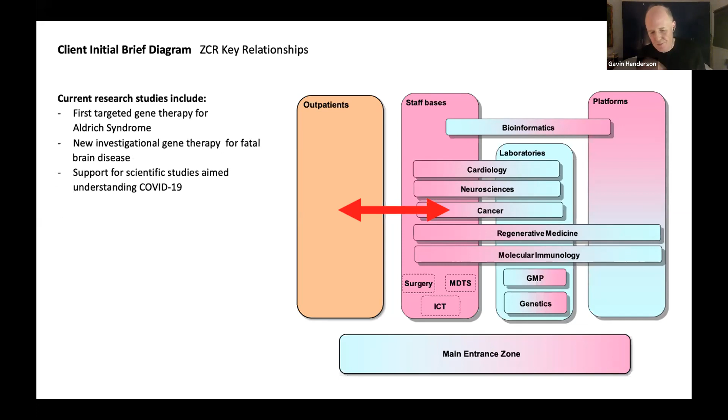Supporting this interdisciplinary approach, there was an extensive program of user consultation. There's a key central user group led by Stanton Williams, engagement with 8 separate user groups reflecting different aspects of the building. And these are supported by multiple subgroups and disciplines. Importantly, also including the Young Persons Advisory Group of patients from the hospital. So I think those of you who work on complex buildings will recognize the amount of dialogue that goes into developing a design for a building of this type.

And whilst this may look quite dry in this form, of course, it's actually all about people, you know, about engaging with different members of the community, particularly within the hospital. And this is a consultation with patients about their experience of waiting rooms and what they're looking for in that environment. And a very important part of that engagement was through the arts program that one runs throughout Great Ormond Street Hospital and has had a particularly positive input into this new building.

So what you see here are images from the development of one of the art pieces, which we'll see later in the talk. So it really is quite a complex and unique set of issues that we're dealing with. It's also a very unique site. It's at the heart of London's Bloomsbury Conservation Area.

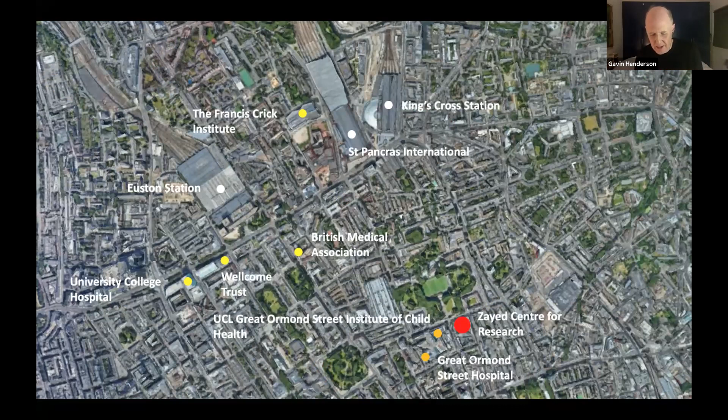And sorry, I'll just go back. What you also see here, in front of where the Zayed Centre is, you'll see there's a large green space, which is Coram's Fields, a space which has been dedicated to well-being for over 250 years. It's now a playground and other facilities. So there's this rather wonderful symbiotic relationship between the building and its contexts.

Coram's Fields was originally the site of London's Foundling Hospital. And as well as being a place of care, this was a place where Handel performed music and Hogarth set up London's first public art gallery. So there's this rather suggestive idea about care actually having a public face and being more broadly engaged with urban culture than we would currently see today.

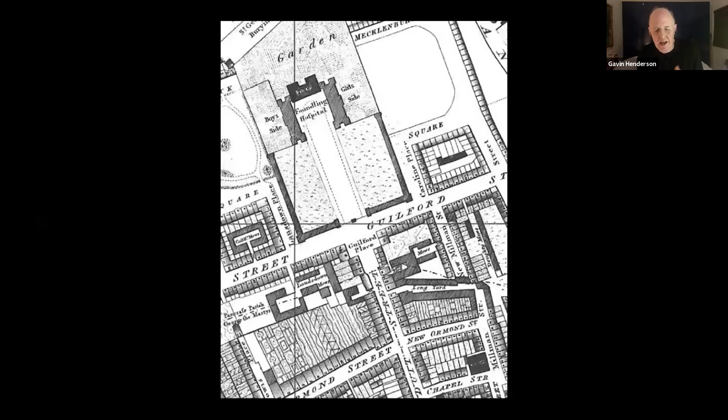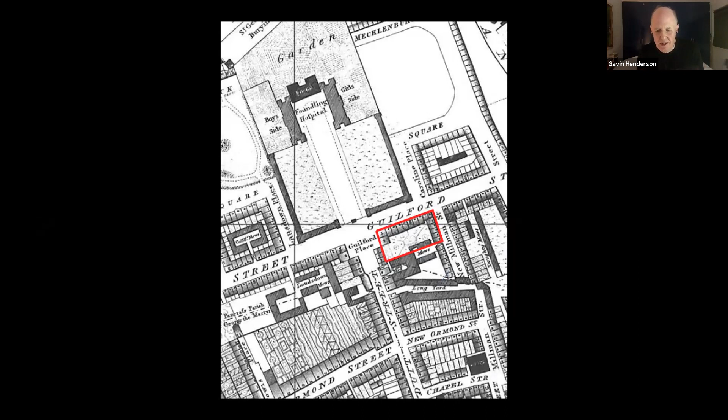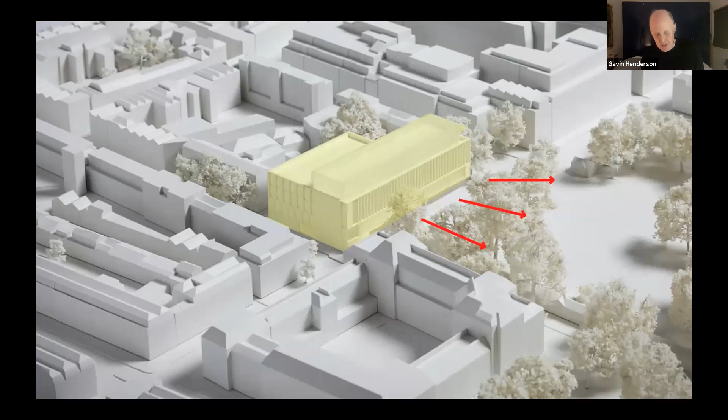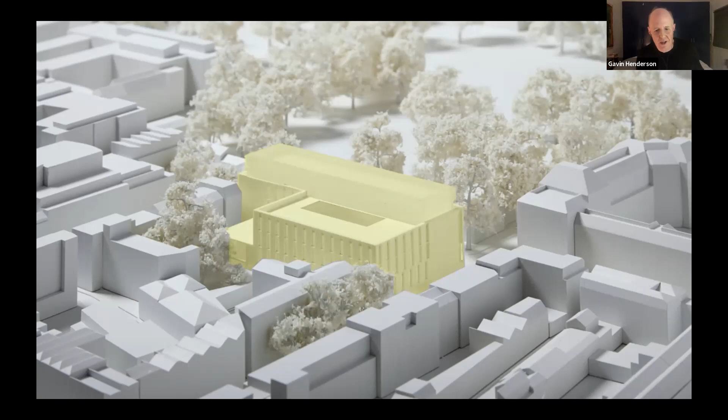The building has an almost civic frontage which faces north over Coram's Fields, but it steps down to the south to really embed itself in this very dense domestic context of the 18th and 19th century buildings. And a key factor of the massing that you see here was the need from the client side to maximize the amount of area that we could develop on the site, but then the control of that developable volume by an analysis of daylighting requirements and rights of light for all of these surrounding buildings. So you've got a higher volume facing Coram's Fields, and it steps back at different levels with different adjacencies at the rear. And that's what you see here.

It's a building actually that's best understood in section, really. The higher volume here facing Coram's Fields, but, with all these different things going on in the building, almost a layer cake of different activities. And we looked at different ways of organizing these, but there's a clarity here to the most technical parts of the building being at the lower levels or right at the top, where they have their own discrete plant areas. And what you can see here is we have a double height laboratory at lower ground floor level, right across the principal facade facing the street. There's other technical spaces at that lower ground level.

There's 2 floors which are largely outpatients department at ground and first floor. Above that, we have research workspace, and then we have clean rooms which are working on gene and cell therapies, which is Europe's largest clean room facility of its type.

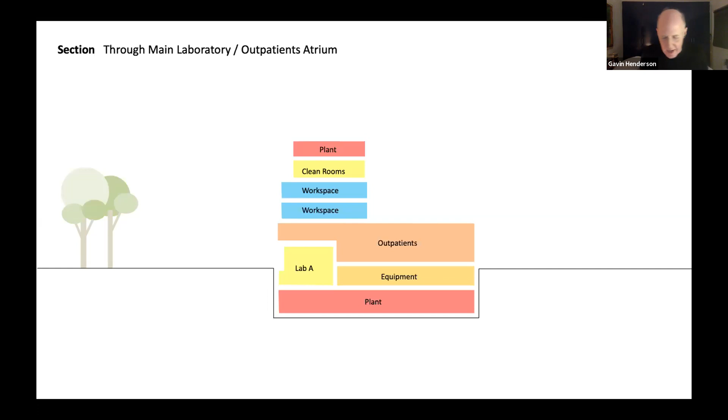And the experience when you're in the building is very much about the relationship between these different activities and between these activities and the external environment. And in particular, this is quite a deep block. It's a building 75 meters long, 35 meters across. So there's a lot of attention into bringing daylight and views into the heart of the building.

And that's very much tied to this idea about placing the experience of children's families and staff at the heart of the design, which is about well-being and also reducing stress for patients. And that approach to well-being is closely linked to targets for carbon reductions and sustainability. Things like the approach to daylighting, obviously working across both well-being and the sustainability strategies.

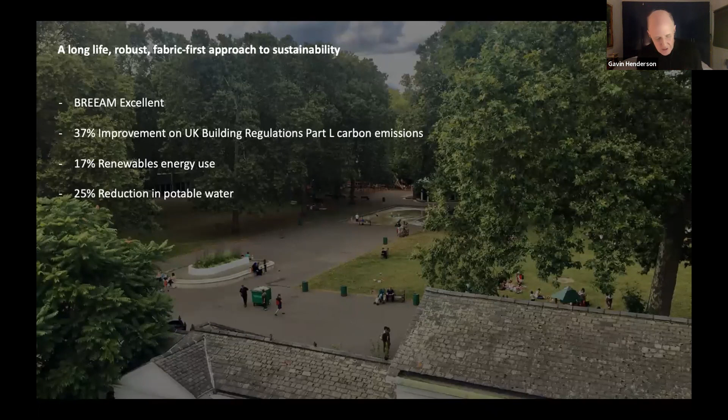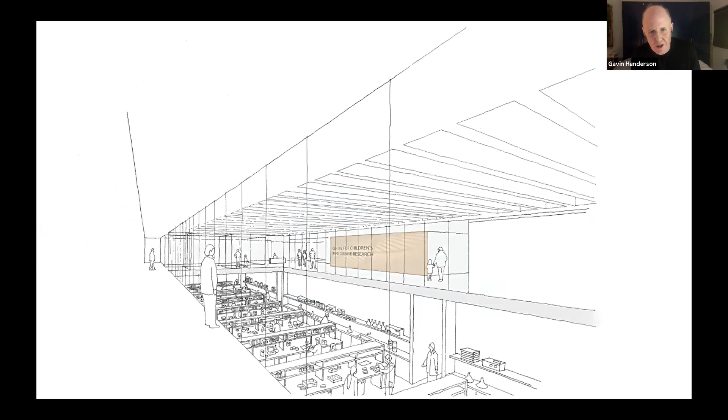Now, hopefully that gives you a sense of the kind of issues and approach to the building that we're looking at. Before I walk you around the building, I want to give you a flavor of how we develop these ideas. In particular, I think there are a number of important themes: the sense of connectivity between different elements, the balance between quite specific spaces that we've created and the flexibility needed for science. In research, I think the mantra is very often nothing is certain except change. So that sense of adaptability is important.

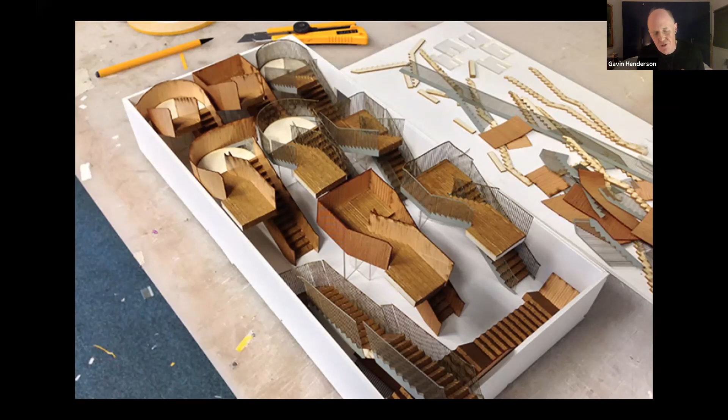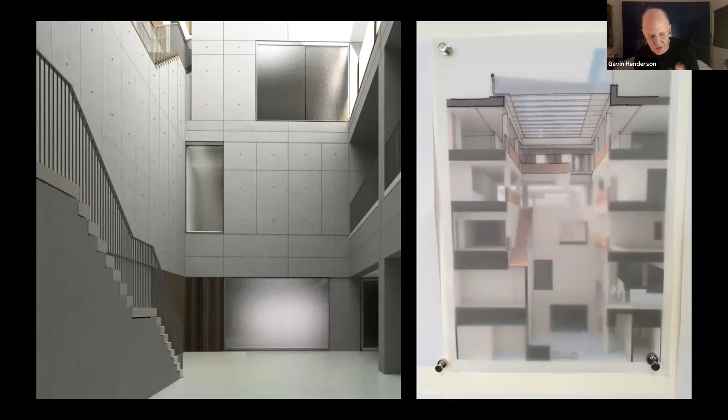And then the way the facade in particular has been developed in a way that relates to its context and relates the internal activities to what's going on outside. And for us, the way we work is very much about working with simple physical models of different elements and spaces. That's exploring the ways that the spaces are connected, almost in a sculptural way, and testing proportions on physical models that work alongside the IT tools that, of course, we use for our technical design.

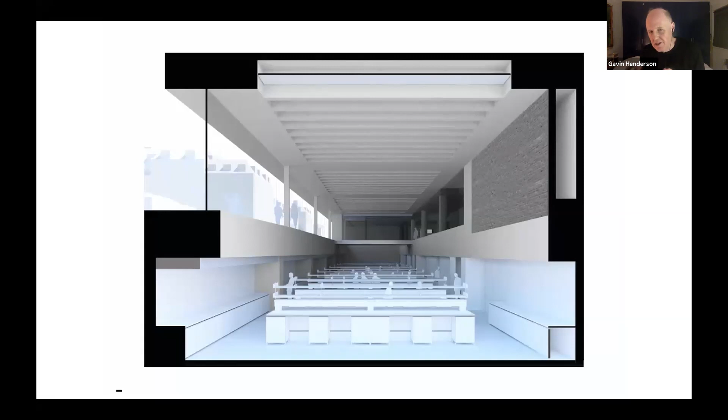And during this process, we're developing a robust language, really, of semi-external materials. And that's also about reinforcing this connection between the inside and outside, and is pulled through even, or perhaps in particular, into the main double height laboratory that you see here. So much of the building is a robust exposed concrete frame. And I think the approach that we bring to this kind of space is very much about using structure as the space forming elements.

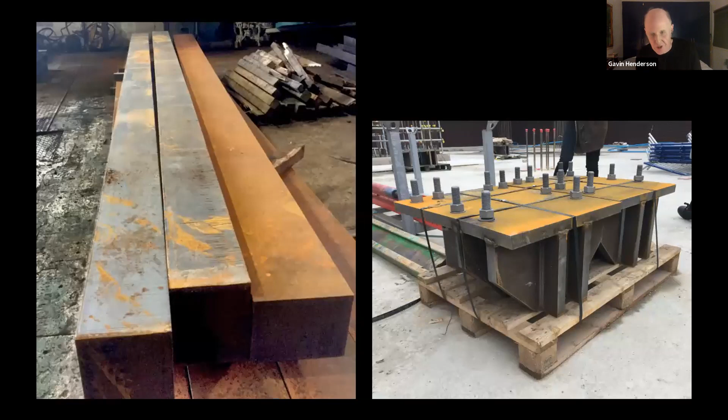And here, again, on that double height laboratory, on the upper left hand side is that street level where you'll be looking down into the space. And the whole building at this point is supported on some slender, solid steel billets to maximize the sense of openness. So there's some very carefully considered structural design to achieve these connections. These are those steel billets, rather beautiful connections within the structural frame.

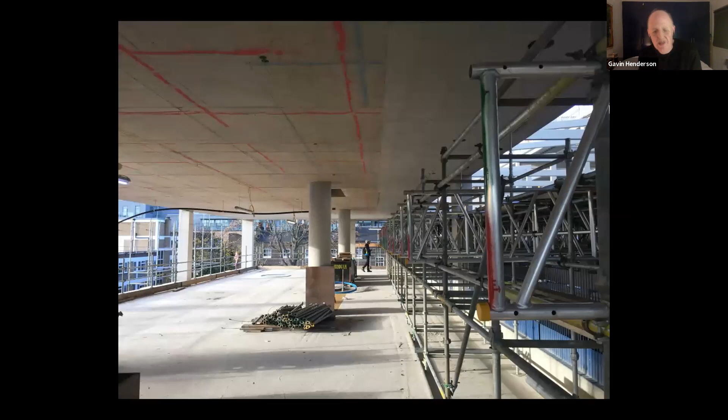So that sculptural use of structure extends throughout the principal communal spaces. So we see these as quite permanent spaces, which carry out the main communal functions and allow you to move through the building. But it's quite important to the understanding of the building to see that these are balanced and that flexibility and adaptability is provided within the more workspace functional areas. And this is a typical approach to those floors with a 9 by 9 meter structural grid and a flat post-tensioned slab to allow for ease of rerunning services in the future.

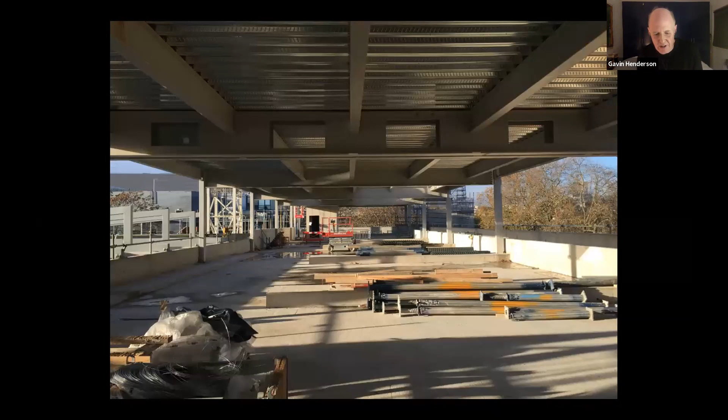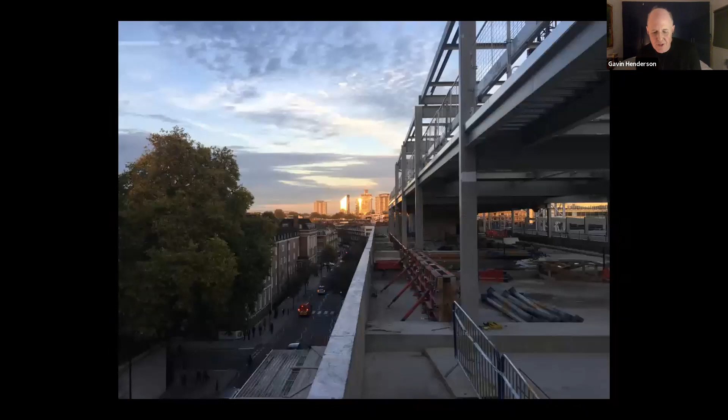And right at the top of the building, we have the gene and cell therapy clean room area, which is structurally a single space, 70 meters long by 15 meters wide, to allow for complete adaptability for future changes. And that's set back from the main facade and provides very much a crowning element for the building.

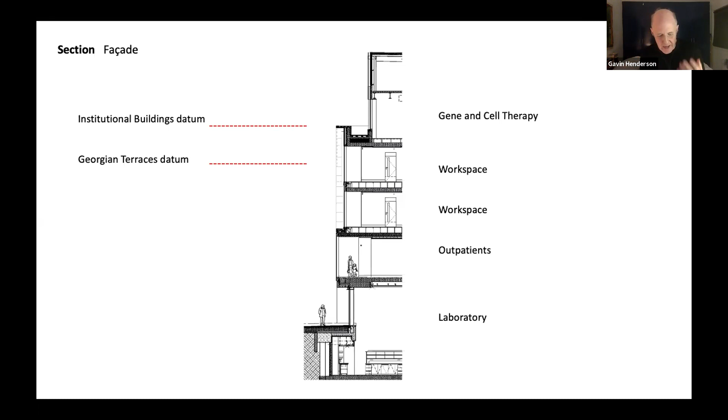So hopefully that gives you an idea about some of the themes we've been looking at through the design and construction. I'm going to talk a little bit about that main facade. And you can see the setback here of the gene and cell therapy clean rooms, and the way we have a lower volume that relates very much to the datums established by the surrounding masonry buildings, the original Georgian terraces, but also the institutional buildings which now surround Coram's Fields.

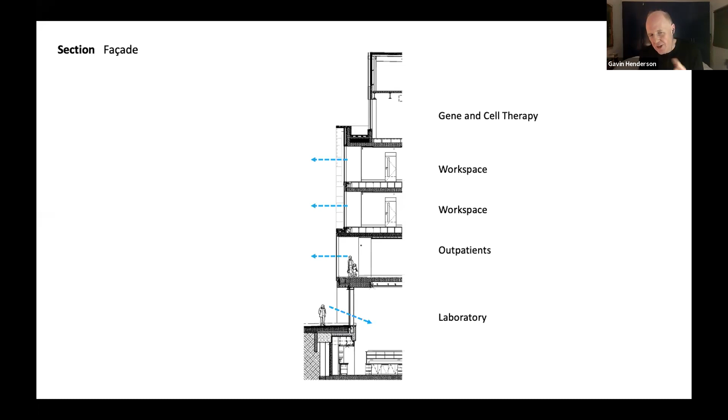And that facade on the lower volume is designed very much to manage views in and out of the building. And facing Coram's Fields, what we began to develop was a screen of terracotta fins that partially open and close according to the functions that are going on behind. Now, I think terracotta is a very beautiful traditional material, but very often contemporary terracotta can have quite an industrial character. So in keeping with the way that we were approaching materials for the building, we were looking to find a way of introducing a more human and tactile quality into this material, slightly more handmade quality, if you like.

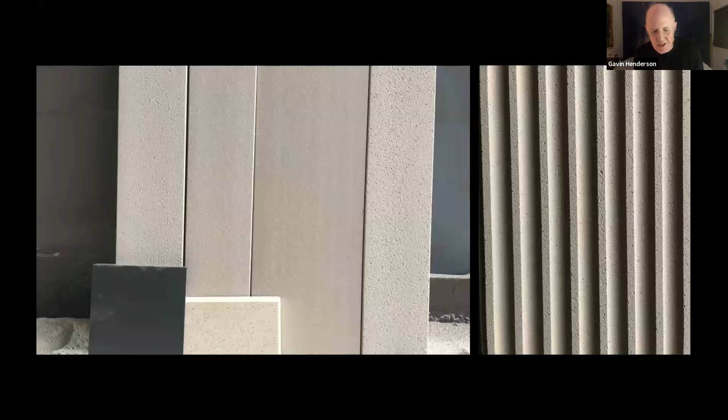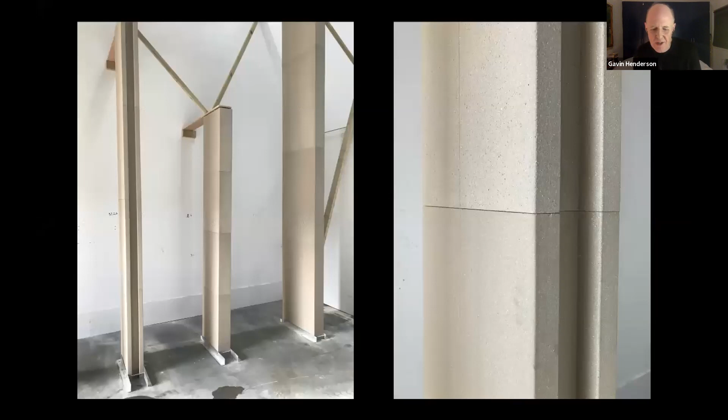So what we've done is that each piece is sandblasted by hand, so that the natural variation produced by the human input produces slightly different surface textures across different pieces of terracotta. So what you begin to see is that whilst the color is the same, there's a different level of reflectivity to each piece, and that produces a subtle variation within the facade. And the facade, as you see here, forms quite a dense screen when looked at obliquely, but actually from the interior, it's very much about framing views to the trees in Coram's Fields that face the building.

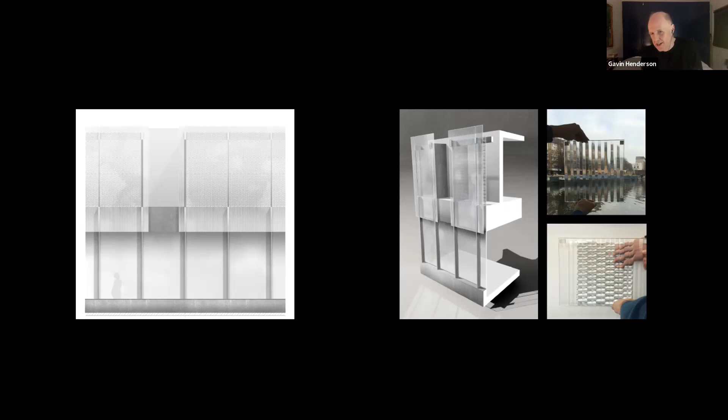Now then, sitting on top of that lower volume is the clean rooms, and here we were looking to create a much more delicate and reflective structure, so that it really recessed back into the sky behind the building. This does not look like a tall building, but it's quite tall in relation to some of its neighbours. And there was a lot of work looking at how we could introduce different levels of transparency and reflectivity. And what the final design has is cladding glass sheets that float in front of the structure. And at different times of day, they look either reflective or transparent, depending on the lighting conditions.

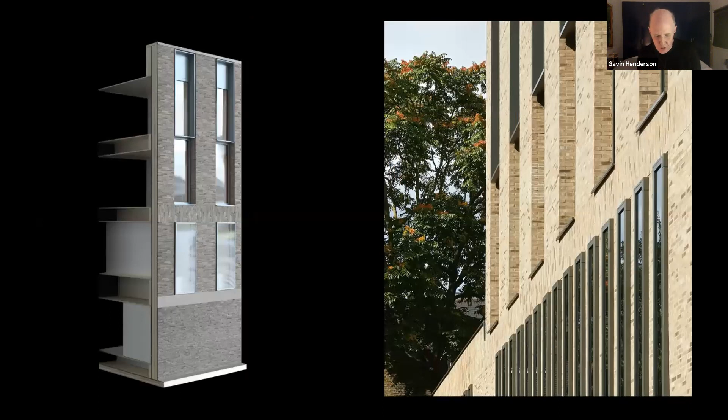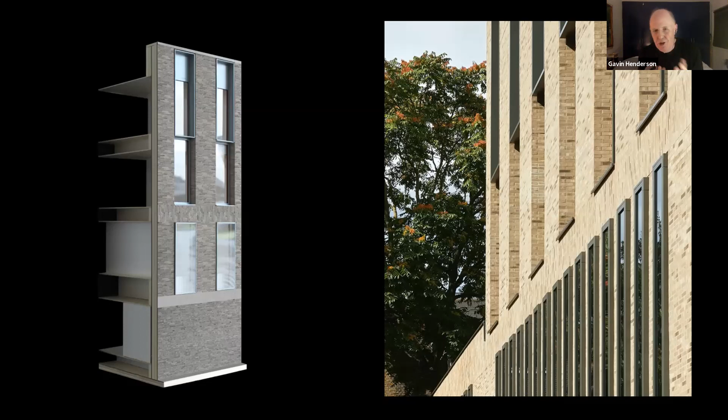And they sit on this lower structure of the terracotta work below, which you can also see is getting steadily lighter, picking up different datums as it moves up the building. And around towards the south of the building, they sit on a much more solid brickwork plinth. And I think what we were trying to do here is relate much more closely to the wall and window architecture of the surrounding streetscape. So we're doing that, but you can also see we have quite wide, deep wall build-ups because of the heavily insulated facades that we are using.

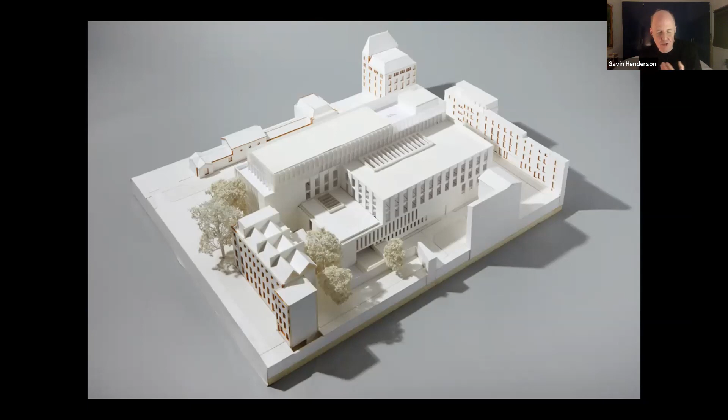So we're exploiting that to create additional interest by pushing and pulling the glazing, sometimes at the back of the wall and sometimes out on the surface of the wall. So that's what you see on the image on the right, which is the side facing the more residential properties. So it's a building that actually has two quite different characters. To the south, it's much more solid and masonry in character. It's also helping us a lot with solar gain and with privacy, because you're obviously controlling issues of overlooking. And to the north, it's almost a fully glazed facade with a delicate terracotta screen.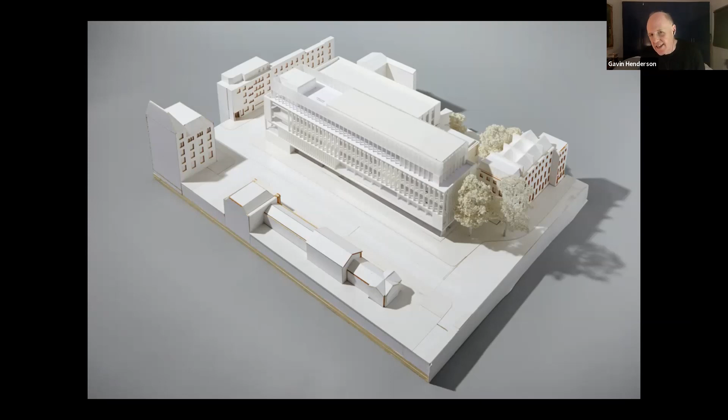But I think what was important to us is that both facades are made out of clay. And clay is what London is made of. It's actually what London is built on. And it's clay and brick and terracotta in different forms that characterize the surrounding conservation area. So we're working with these very traditional materials, but in a more contemporary way that allows the building to sit within its context.

And those fins give a solidity to the building in the oblique views, which is what you usually experience. That's how you experience the building, because it's along a street. And that's quite important within the context of quite solid buildings within the conservation area. But of course, actually this facade is glazed behind those screens. What they're doing is they are concealing some activities, but deliberately revealing others.

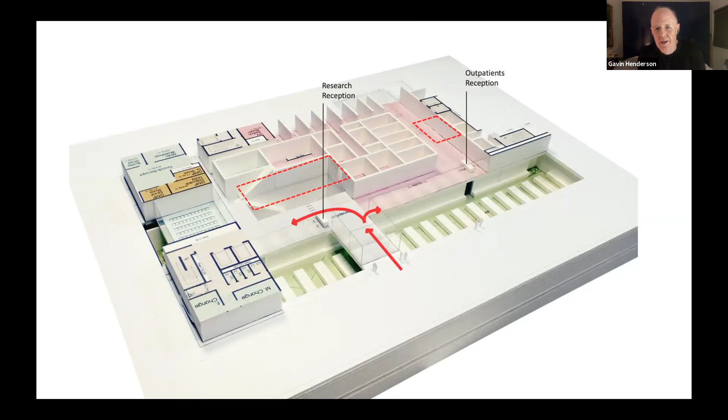I think it was at the point when we established this as an idea that it really unlocked the site, because it enabled us to put primary working spaces at the lower ground floor, which we needed to do to fit within the envelope that we could develop. And we wanted those spaces to be this high quality environment with daylight and views. And so there's always that kind of working between squeezing things into the site, but then really working hard on the quality of the space that we are creating.

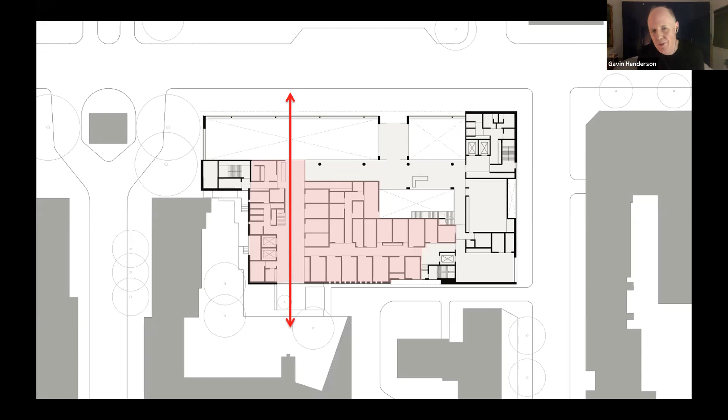And that arrangement is replicated on the first floor, where it's complemented by these views from the north-facing waiting areas overlooking Coram's Fields. And there's also a very important visual connection through an opening back into the research atrium and the research part of the building. So it's all about forming these links.

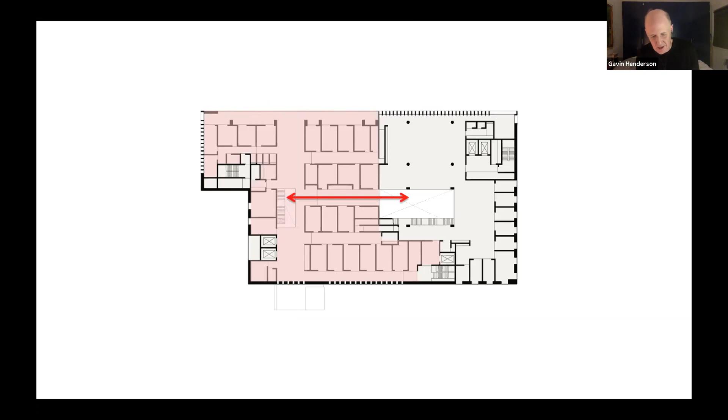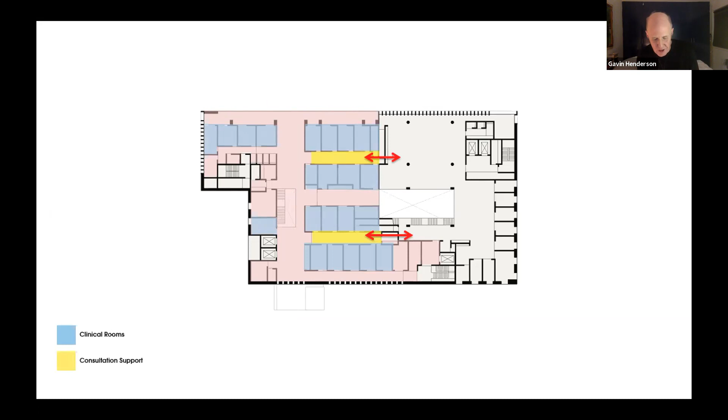It's very much about creating a single unified identity, and also not condescending to the young people who are using the building, who are in fact from a very wide range of age groups. In common with the Sainsbury Laboratory, you can also see here there's very little in the way of visible services in these primary spaces.

Consultation rooms are very simple clinical spaces, but I think very importantly they are generous enough for families who can gather around a table for consultations, and they all have borrowed light from the waiting areas outside. And as you wait in those areas, you can watch the life of the street outside, engage with the exterior and with the landscape beyond.

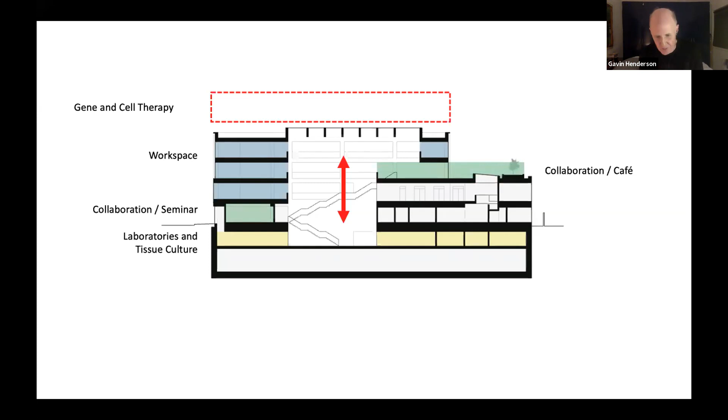So in plan, I'm just going to work my way gradually up this section. This is the lower ground floor. The principal laboratory spaces in yellow, these all have either daylight from the exterior or windows onto that atrium space. And the majority of the other spaces at this level are either equipment or support rooms or tissue culture rooms, spaces where light was less important.

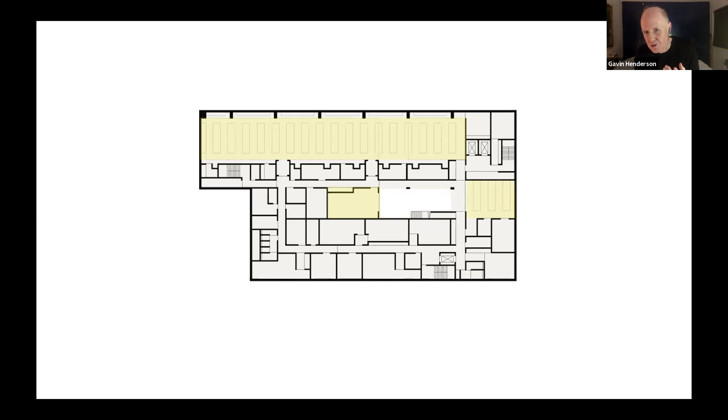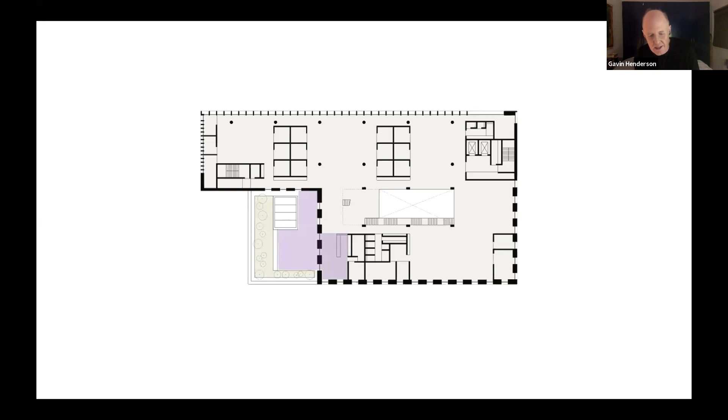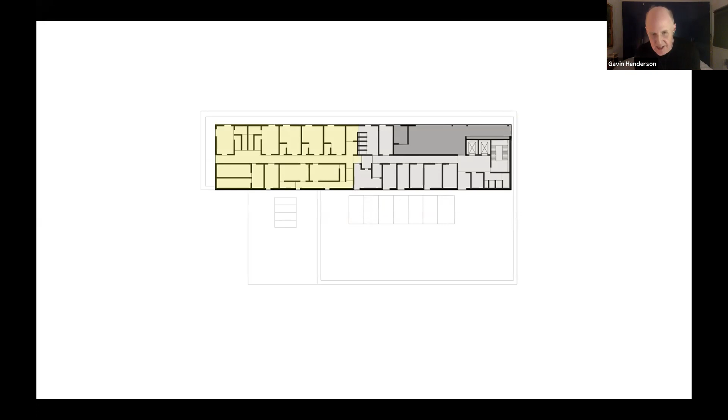And here we have the cafe and the external terrace for socializing, interacting with colleagues, exchanging ideas. And then at the top of the building, we have the clean room facility, which is actually, slightly ironically, that very large space is actually the most cellular space within the building, with a very complex flow of clean and dirty activities for people and materials, the clean rooms being the yellow area on the left-hand side here.

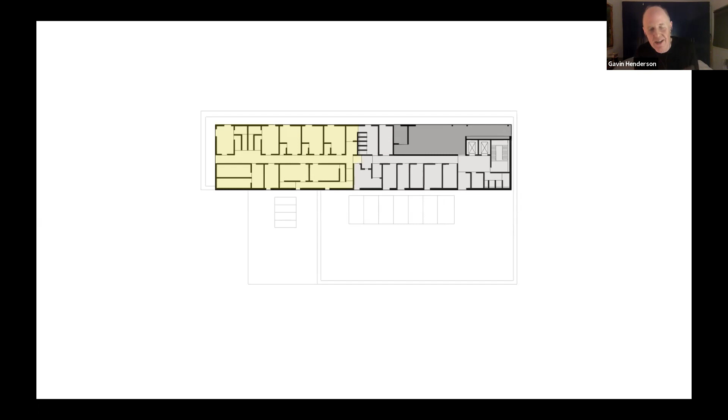So I'm going to actually just illustrate that movement up through the building, which connects the research side of what's going on. So we have the principal laboratories with the daylight and views out to Coram's Fields at the lower ground level, other laboratory spaces which open onto the atrium space, the stairs which are more solid at that lower

level, but then become more delicate as they go up, and they connect through to the research workspace areas, which are quite simple, hard-working spaces, but all characterized by these views all the way through the building, so you get daylight from the atrium and views out to the outside.

And on this floor also we have this rather beautiful south-facing cafe terrace environment, which takes advantage of some of the trees that exist within the interior of this urban block. So that is all about breakout and the ability to meet and exchange ideas with your colleagues.

And then, of course, at the top of the building, this is a much more secluded, secure area, and much more driven by the technical controlled environments required by the clean rooms. In fact, if we were walking around the building, I don't think we would get into this. So this actually gives you a really good idea of what's happening here, which are really quite remarkable